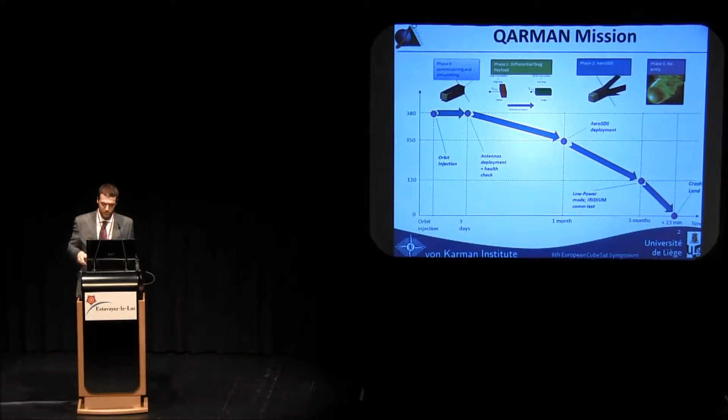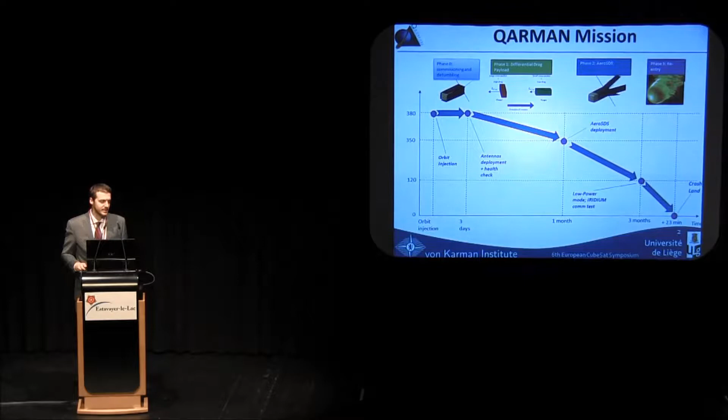Maybe I can go quickly through the first slide describing the mission. Just a couple of remarks to better understand my presentation. The mission has two relevant phases from the thermal point of view: the orbital part, especially for the differential drag maneuver, and the re-entry part, which is the most interesting and challenging thermally, because the satellite will experience an extremely harsh environment with very high temperatures that can go above 2000 kelvins on the front cork part of the satellite. To achieve the mission objectives, it is fundamental to adequately insulate all the parts necessary to survive up to the end of the mission.

This is achieved through different techniques to thermally insulate the satellite. The first is the presence of a cork nose on the satellite, approximately the size of 1U of CubeSat, even if it's not completely full, because inside will be hosted a spectrometer for measurements during re-entry. We just finished a test campaign at the Von Karman Institute with plasmatron facilities, and also many simulations, in order to define the shape and the material. This analysis led us to choose the P50 cork, which is an ablative material capable of shielding the satellite from the high temperatures it will experience.

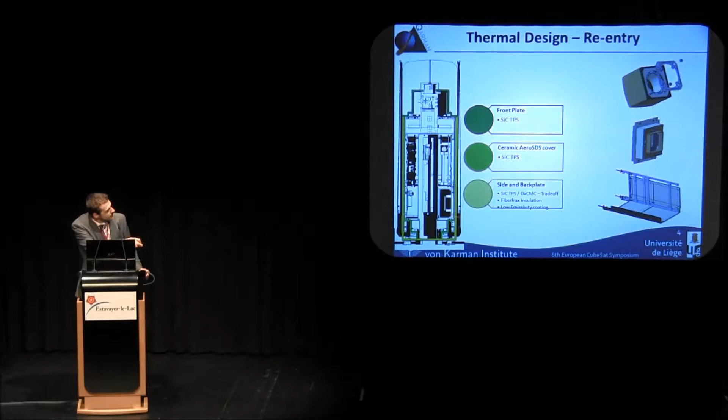A second stage of protection is provided by ceramic walls, which surround the entire internal parts of the satellite. We are using ceramic plates in three different ways: a lateral protection, the yellow one, which could be in silicon carbide or OxCMC — the trade-off is still in progress, but we do not expect big differences in thermal performance — and also two plates placed on the front and back part, in order to further insulate the satellite. The front one is necessary to thermally decouple the internal environment of the satellite from the ablative shield, while the back part insulates the internal part, because here we replaced the hinges for the deployable panels, through which hot flows can come in. So it's absolutely necessary to lock this part.

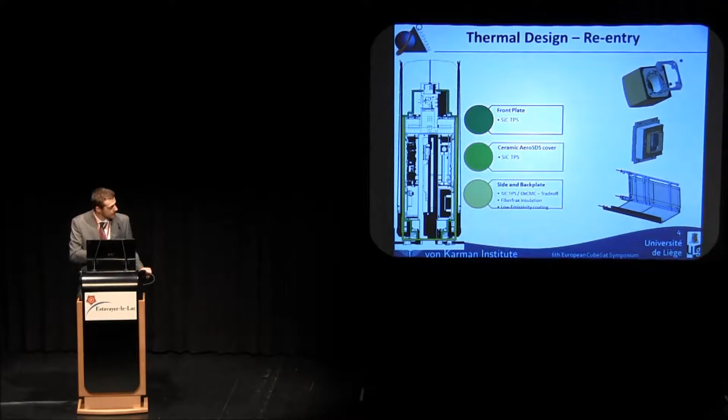The last stage of protection is provided by boxes we call the survival unit, in which we place all the electronic components necessary to survive the re-entry phase. Those components are the OBC, the batteries, the iridium comm system including the antenna, and the data acquisition board, placed in this front survival unit, which is the main one.

The insulation is achieved with aerogel, an extremely lightweight and insulating material, which is already space qualified. That insulation layer is enclosed in a titanium box, shown by the dark blue line. Why titanium? For optimal thermal performance, and also because it's a 3D printable material. There are techniques for that, which give more freedom to optimize the shape of this box in order to house it inside the satellite, because as you can see, it's quite a packed configuration.

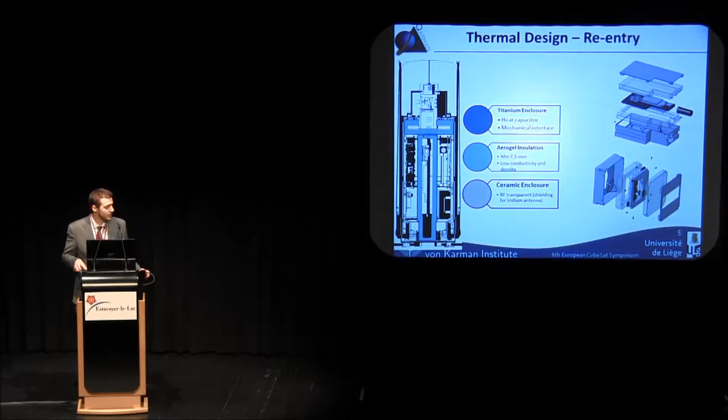We don't use titanium to surround the iridium antenna, in order to avoid RF interferences, but we go for ceramic material there instead. This part is still under evaluation, so we might change it slightly in order to optimize the EMC, and some tests will be performed at the Delft University facilities in the coming months.

Let's have a closer look at the survival unit concept. The PCB inside, the dark blue one, hosts all the electronic components, and the iridium antenna, the black cylinder here, is directly connected to it. This PCB is stuck directly to a thick aluminum plate with the purpose of a heat sink, capable of storing some thermal energy and also distributing temperatures uniformly during re-entry.

You see the transparent layer, which is the aerogel insulation with a minimum thickness of 7.5 millimeters, identified as the minimum to provide sufficient protection during re-entry. Everything is enclosed in this titanium box, which also serves as the mechanical interface to the rest of the satellite, because the aerogel is a quite brittle and soft material, so it's basically impossible to mechanically connect it with screws, spacers, or any other way. So we need a mechanical interface, and we decided to go with that solution.

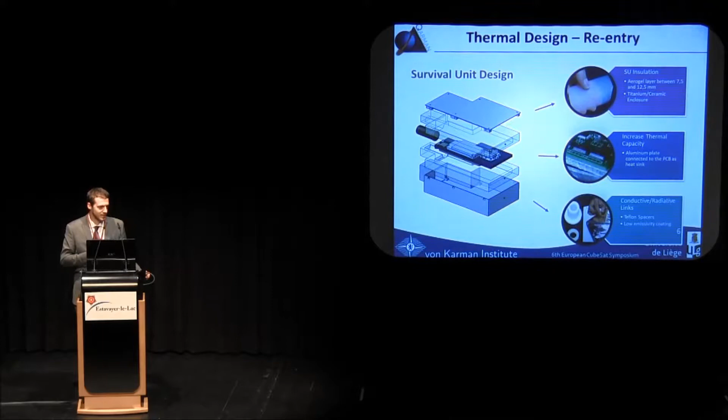The box is then thermally insulated thoroughly from a radiation and conduction point of view, using low emissivity coatings, and also the spacers will be made in Teflon. The purpose of all this is to heavily insulate and completely thermally decouple this unit from the rest of the satellite, which is of great importance during re-entry.

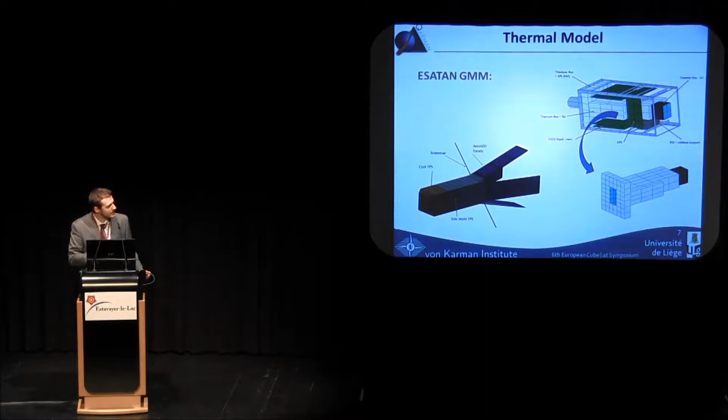To validate the design, some thermal analysis has been performed. Here you can see just a few pictures of the thermal model and the way we model the survival unit inside and the thermal connections. I could speak for months about all the details implemented in the thermal model, because it's very important to have a highly refined thermal model, since the environment is extremely demanding from this point of view.

The boundary conditions applied are derived from CFD analysis, from which we see that the highest temperature will be experienced on the front cork, and could go above 2000 Kelvin. The side walls of the panels are a little bit lower, and this is a worst case scenario, so the actual temperatures might be a bit lower. That's from the boundary conditions.

From our point of view, we need, for some reasons, to keep the iridium transmission always on during re-entry. The reason is that the plasma sheet surrounding the satellite during re-entry basically prevents the comm system from communicating. So we don't actually know exactly when we will be able to transmit, so we just need to keep on trying until we succeed. That means we will have continuously 3.5 watts of heat dissipation inside, which is not helping in sizing the TPS system.

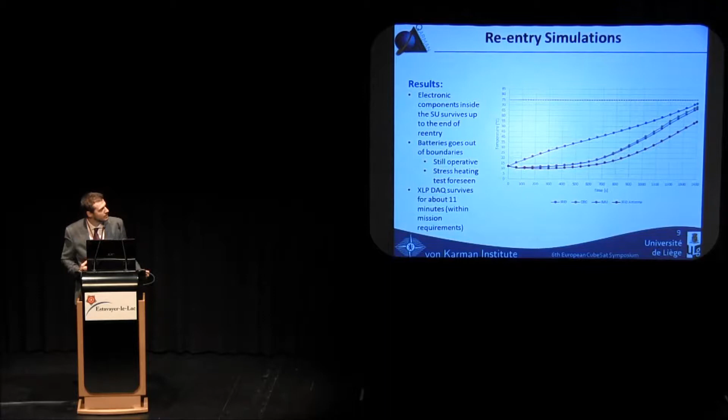The simulations done show those results. Up to the land crash, we're basically able to keep all the electronic components below the temperature limits. The initial conditions here are derived from a steady state analysis of the orbital case in low power mode, which is the mode in which the satellite will be just before the re-entry phase. The iridium component has higher temperature with respect to all the rest of the electronics, but still at the end of the re-entry phase it will be below the operative temperature limit.

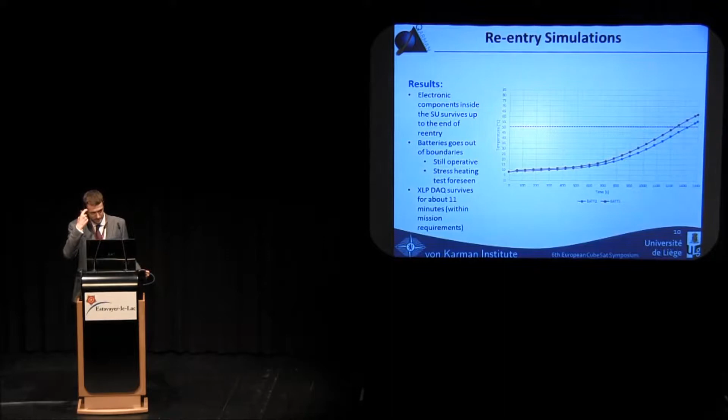What will be slightly out of the temperature limit are the batteries, but only because the temperature is around 50 degrees at most. Luckily, it means only that the performance will be degraded and probably the recharge is a bit compromised. But it's the last use of batteries we will have, so this is not going to be a problem. ESA during the PDR review asked to perform some breadboard testing to see the heat stress on the batteries during re-entry, to actually assess that this going out of spec is not a problem. Those tests are currently scheduled for the coming months, so I cannot show results about it, but I hope I will in some next occasions.

In conclusion, I show you that there is also a front survival unit, a small one on the top of the satellite, where the data acquisition board is placed. This box is less insulated than the main one, let's say. In fact, the temperatures will pass the maximum operative limit at around 11 minutes, so they will not survive up to the end of re-entry.

This is actually within the requirements for the science mission, because up to that time we will reach an altitude where we are measuring for enough time to get good science data, and we already transmitted those data to the main PCB and stored them, ready to be transmitted through Iridium. So this is not an issue because we have already finished our data acquisition at that point, so it's basically free to burn.

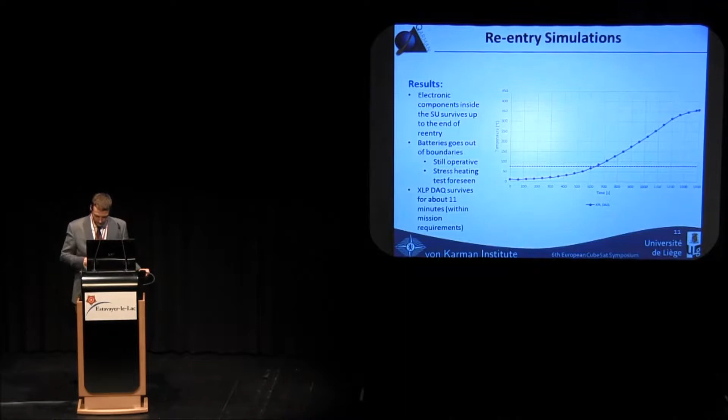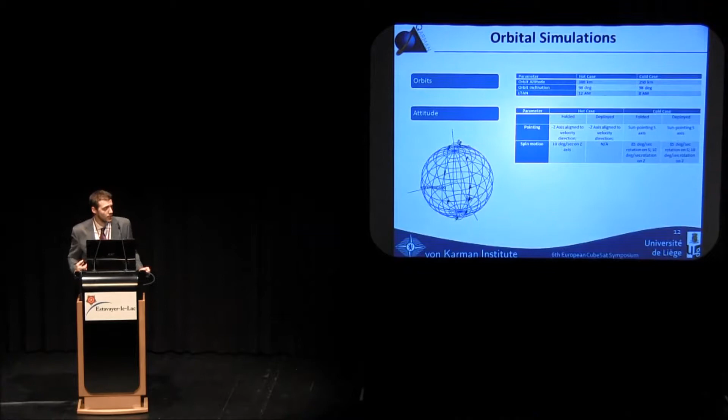Then, of course, this design must be consistent with the orbital part. For that purpose, some hot case, often called worst case, analysis has been done. Nothing different than the usual analysis done for CubeSat, so definition of worst case attitudes and worst case orbits, which must anyway be within the QB50 boundaries.

That led us to results where basically all the components outside the survival unit are well below the temperature limits. Only the GPS unit is slightly close, but not above the temperature limit. Anyway, the GPS can be somehow duty cycled to lower this a little bit. What's interesting is also that the survival unit is actually thermally decoupled from the rest of the satellite because it's not feeling the temperature cycling at all.

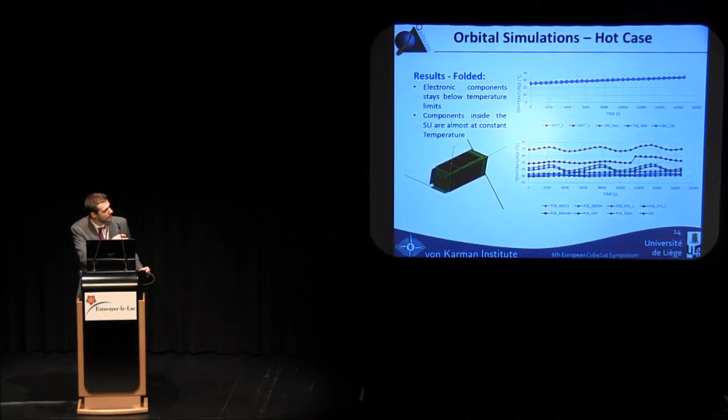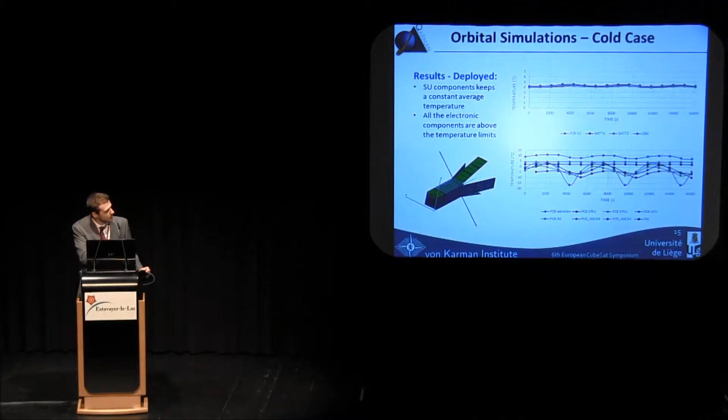Again, the survival unit components are basically thermally decoupled from all the rest of the satellite. The cold case also leads to the same conclusions, so the minimum temperatures are also above the temperature boundaries, both in deployed and folded configurations.

So let's go quickly through the conclusion. What I wish to have communicated to you is that it's actually feasible to design a thermal protection system for re-entry, even for a CubeSat size satellite.

We chose this solution for the survival unit, providing high insulation with the presence of a heat sink, which is necessary. We realized this with the purpose of saving only the necessary components to achieve the mission. For example, the ADCS is not going to be used, so we can afford to lose it at the end.

This is for the survival unit. Nevertheless, that's not enough - the rest of the satellite may also need to be externally insulated. So the presence of an ablative material is absolutely necessary, and the wall insulation is necessary as well.

What is also important to note is that there are actually concurrent requirements, because from a certain point of view we want to insulate the satellite completely from the environment for the re-entry part, but for the orbital part we actually need to dissipate extra heating coming from electronic components, like the ADCS units or the GPS. So we need to find a way to achieve both tasks, which is literally opposite from a project point of view.

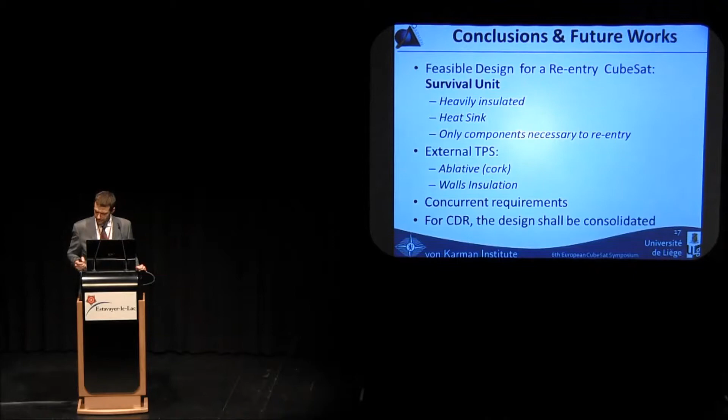We are currently just past the PDR. We passed the PDR at ESA a few weeks ago, and we are now preparing the assembly phase of the engineering model. We will go with a model to the CDR, and for the CDR we want to finally consolidate the design, because there are still some things that might be improved, we believe. So we are continuing to work on this.

Thank you for your attention, and thank you also to the entire QARMAN team, which is giving me the chance to experience this new task of thermal design, which is quite new for me. To ULG, which is supporting me a lot for the thermal design, and also to ESA for funding the project and giving us this chance. Thank you very much.

Swiss Space Center, EPFL. I have a question, or more of a comment. I think you have taken into account that there will be high temperature not only on the top of your satellite but also on a dome on the backside. So in your tests it's impossible to simulate this situation, and I think you should make some additional tests, because you will have high temperature inside because of the heating from the dome.

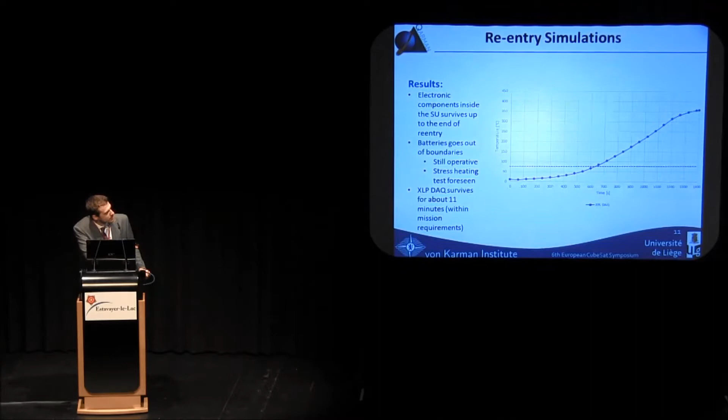That is correct. What I showed in this picture - let me go back quickly - the test inside the plasma wind tunnel facility for the cork was actually to qualify the material. It was part of the trade-off breadboard testing for choosing the best solution for the cork material. Of course it's not a test to certify the thermal environment behind the cork insulation, but the purpose was just material selection. We tested different materials, our colleague did, and we came up with the choice of the P50 for many reasons, because we believe it's better. But yes, we are perfectly aware that at the back we are not having the same temperature profile we would normally have during re-entry. Thank you for your comment.

Just a second question: did you calculate the point of landing, or what's your plan about how to catch this during the re-entry part? Well, actually we are not planning to retrieve the satellite after landing. Below 44 kilometers, according to our simulations, the plasma sheath should not be there anymore, or rather should be weak enough to allow us to communicate with the Iridium constellation. So below this altitude we are going to transmit all the data using some techniques that my colleague at UMIT is refining, in order to send all the data collected in the previous phases. But after the landing, the crash mission is over, so we're not going to be looking for the satellite, or even transmitting after landing.

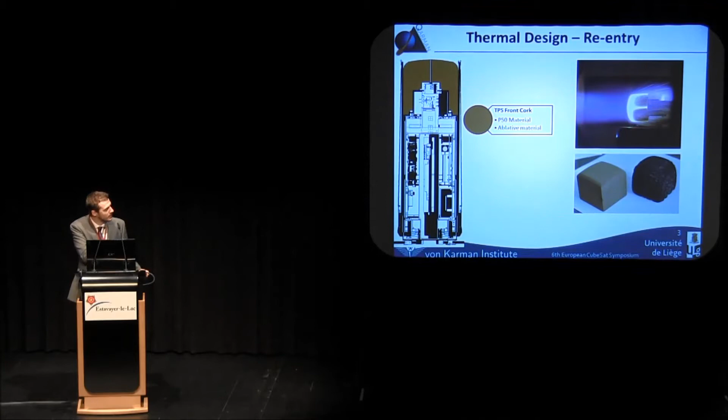Or again, we can somehow try to play a bit with the radiation inside, but this is quite more complicated because, as you see, the satellite is quite packed, so we have not much view factors inside. Anyway, it's been an issue from the beginning, because if you highly insulate everything, it's not going to work in orbit. If we leave a radiative path to dissipate the heat, that is bad because we also have incoming heat during re-entry. So it has been complicated, but that was, let's say, the compromise we found.

So two questions there on the right, and one on the back. Starting in the back. Hi, thank you for your presentation.

So on slide 6, you mentioned that you're using aerogel for the insulation of your re-entry module. Have you done any work on the mechanical strength of the aerogel? Because, as you mentioned, it's very brittle.

And first of all, sorry, I cannot see you speaking. Okay, I'm sorry.

We know it's brittle and it's soft, so that's why we want to enclose it in a titanium box. The mechanical tests have not started yet. Basically we didn't do any hardware test about that so far, besides the cork one. But yeah, it's in our mind to do it in the next phase. We are already procuring material and different kinds of aerogel to see the best solution possible. But yes, we want to do, of course, mechanical tests.